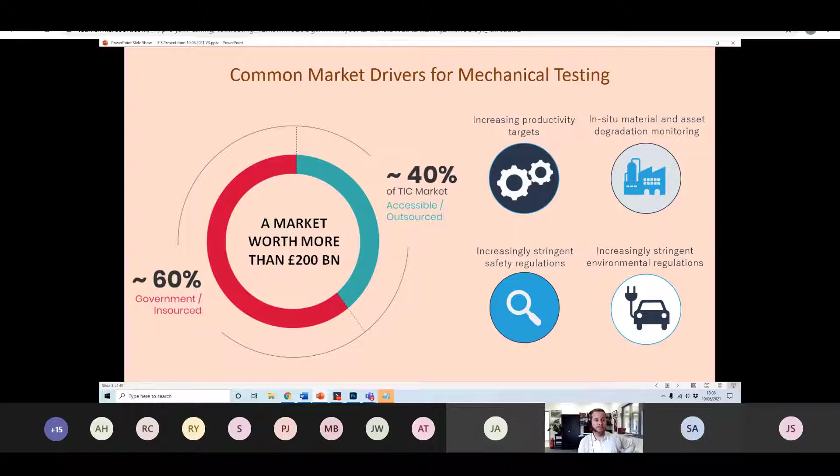Okay, what about then just a very quick, very brief history of mechanical testing methods? Well, we've been interested in mechanical properties since the Stone Age and through the Bronze Age, and from the Bronze Age to the Iron Age and to, well, if you want to call it the Silicon Age now, or whatever. But the importance of materials has been recognised throughout history.

Sometime later, around 1890, early tensile test machines started to become available. And in fact, the tensile test since that time has remained the gold standard in mechanical testing, and it continues to be the go-to method for measuring things like stress strain curves. But it does suffer from some limitations, and we'll maybe cover some of those in a few slides' time.

Also emerging at about the same time, early 1900s, was the Charpy impact test, which can be used for measuring things like the fracture energy or the toughness of materials. And that technique is popular because it's very simple and it's very easy to prepare the specimens, and it therefore continues to be used extensively, much like the common tensile test.

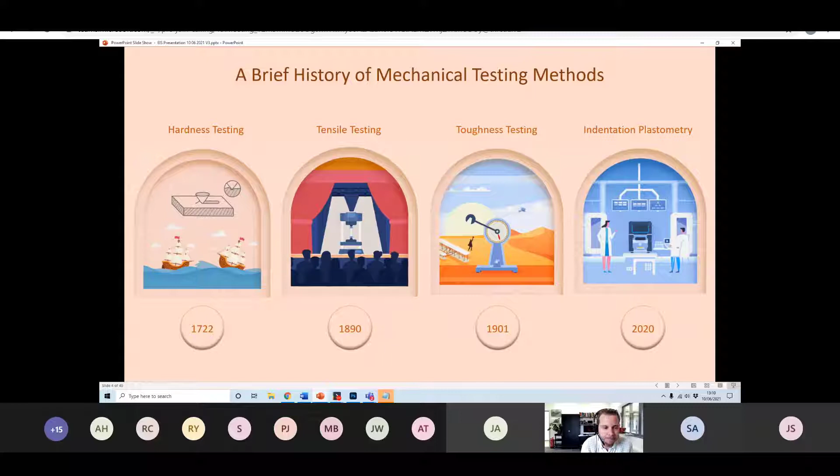What do they mean? How do we define them? Because in my own experience, both when I was at the university in Cambridge and also through my interactions with industries, these terms are sometimes confused. And even when they're not confused, there can be some subtleties and nuances that tend to get lost. And these can actually be really quite important when it comes to interpreting materials testing data, which is why my presentation today is really geared towards trying to clarify some of these points.

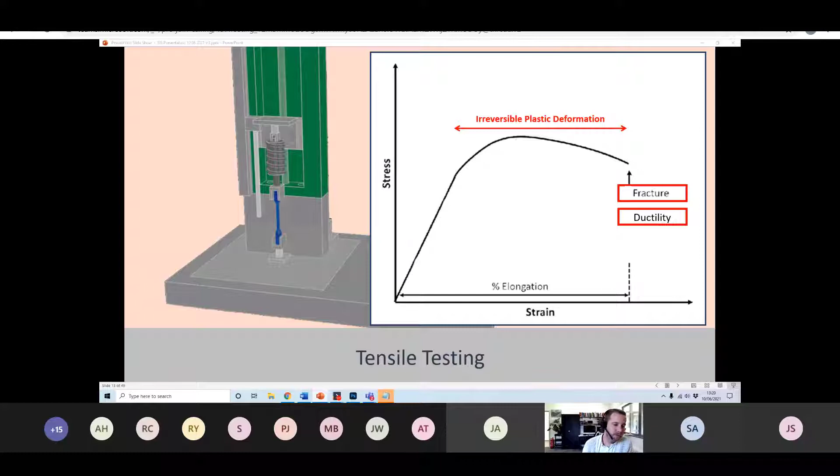So when people cite a ductility value to you, it's often, and I don't mean to be contentious, totally meaningless. If you search the literature for ductility values of a particular alloy, and there's no information about the test specimen dimension, then that information is also meaningless. The only real way a ductility value can be used is to rank different materials tested using the exact same specimen dimensions. Otherwise, ductility values have very limited engineering utility.

As one example, and we won't name names, we've worked in the past to help a company that was using ductility values - measured nominal strain at failure - in their finite element calculations or crash simulations, not understanding that it's totally sensitive to the specimen dimensions they were using in their tensile tests. It made a big difference to the predicted outcomes from those FE simulations. So it's not well understood, but crucially important in some cases because it's related to fracture and failure.

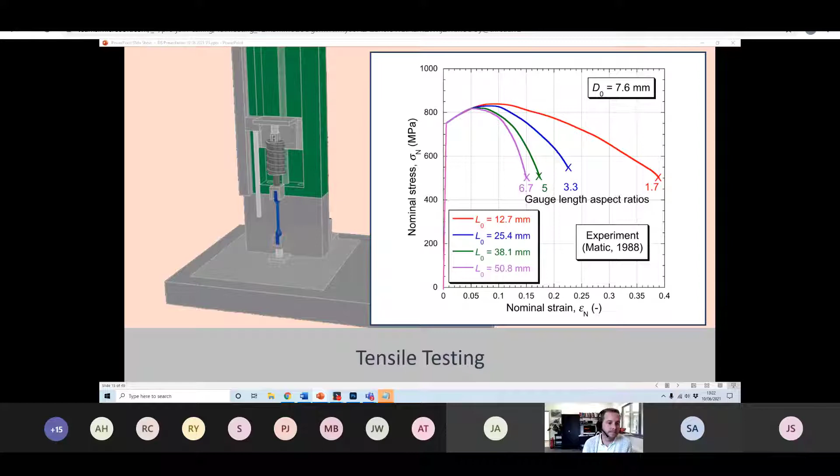One way of very simply confirming that this is not quite right is to compare the units of toughness, which can be expressed either as joules per meter squared or megapascal root meter, with the units of the area under the curve, which is just joules per meter cubed. So the two are dimensionally inconsistent, which is one indication that they're not the same thing.

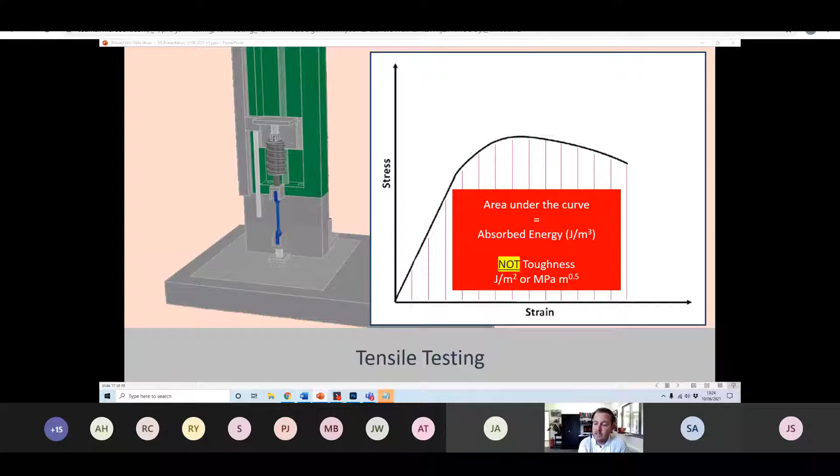In fact, if you want to measure the true toughness of a material, or its fracture energy, it's best to use something like the Charpy impact test. We indicated earlier in our historical overview of mechanical testing that this arrived on the scene around the early 1900s. This is a much better way of measuring toughness because it directly measures the energy absorbed during a fracture test, purely related to the propagation of a crack.

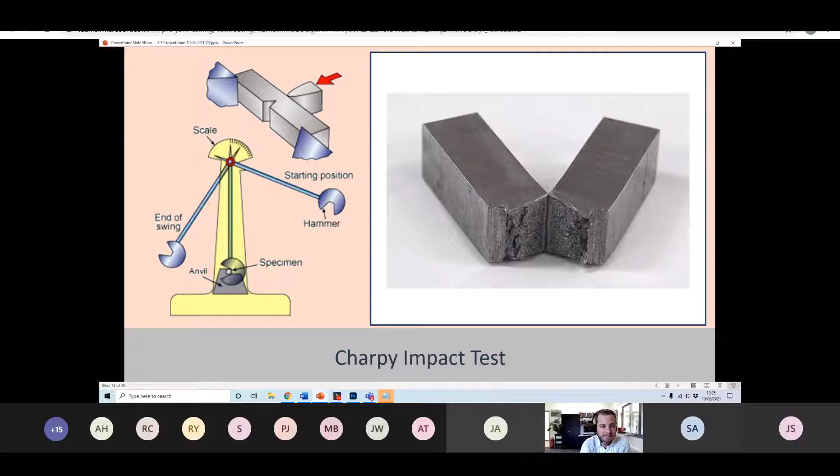All right, so we've done stiffness, strength, ductility, and toughness, and we're now going to move on to hardness. Some of the reasons why these terms get confused is they're often related to each other. Strength, for instance, and hardness are quite closely related, although not in a way which is easy to define.

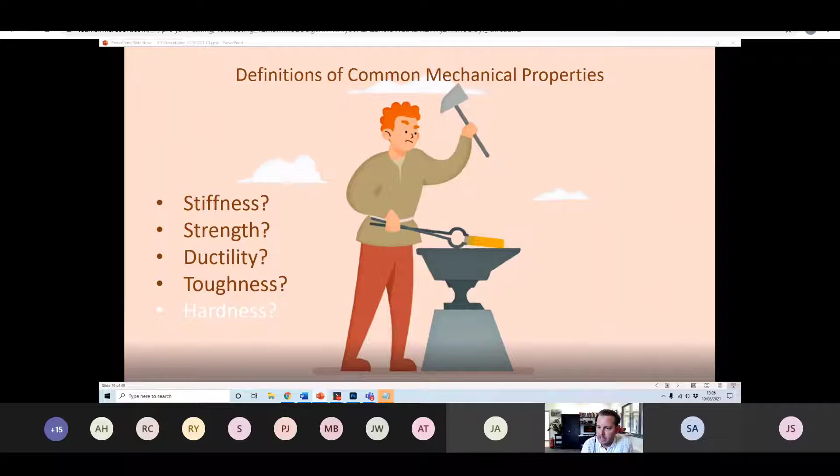So let's again start by defining what hardness is: it is specifically a material's resistance to plastic deformation. Since we're all now familiar with the stress strain curve, we can understand this definition in view of what we know about the yield stress and hardening behavior of material. If hardness is basically a material's resistance to plastic deformation, then materials with high hardness tend to have high yield stress values and/or high work hardening rates.

The work hardening rate is the rate at which the stress approaches the ultimate tensile strength from the yield strength. So the hardness number is very closely related to the stress strain curve, ergo the strength of the material. But importantly, what you cannot do is infer or calculate what the stress strain curve looks like simply from a hardness number. That kind of translation is impossible to do, maybe more on that later.

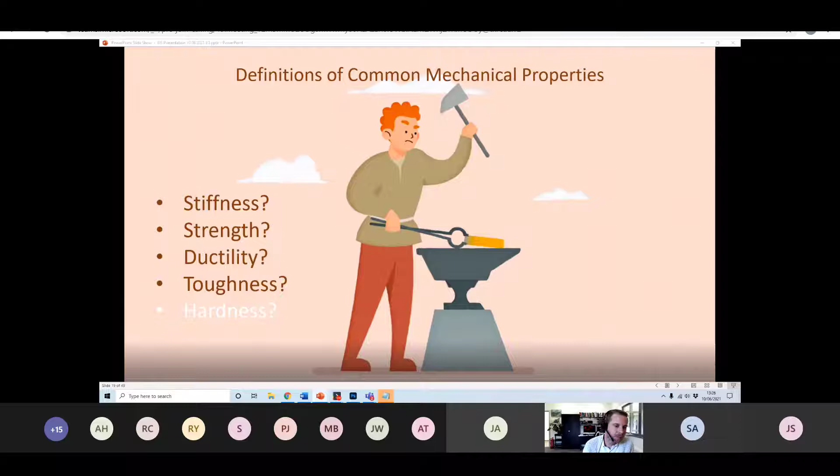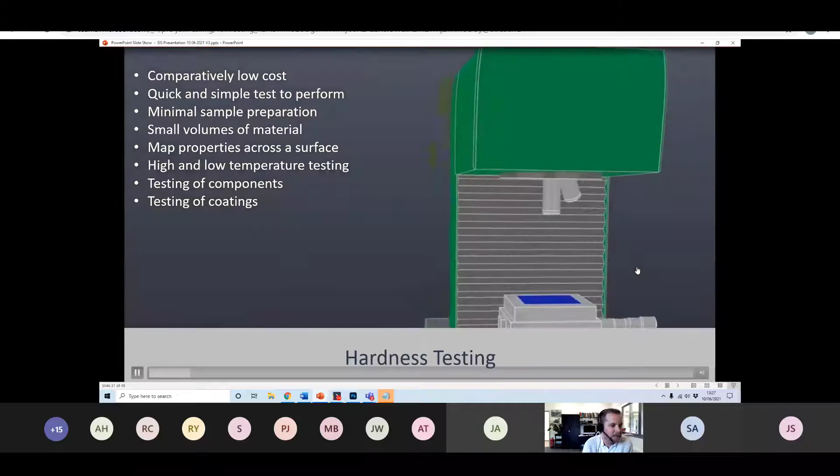The reason why we like hardness testing, and most people are familiar with it, is because it's extremely simple to do. It's very low cost. Sample preparation is minimal. You can test very small volumes of material. You can map properties across a surface. You can do testing at high and low temperature if you want to. You can test real components, and you can even test in-service components. That's some of the reasons why we like hardness testing.

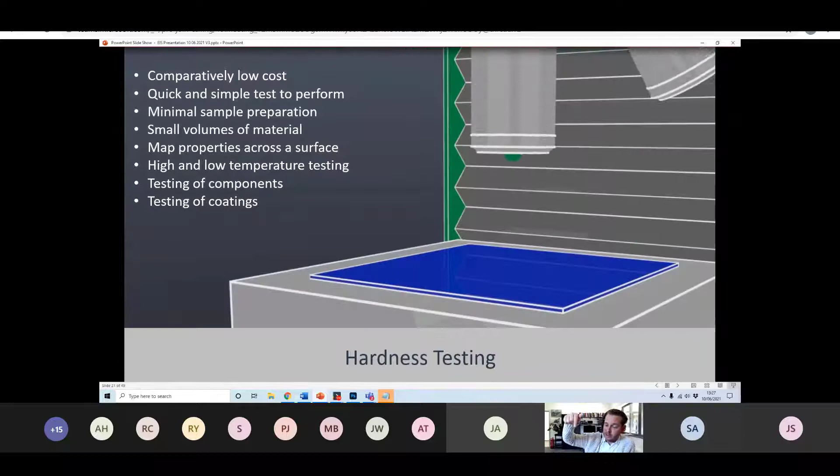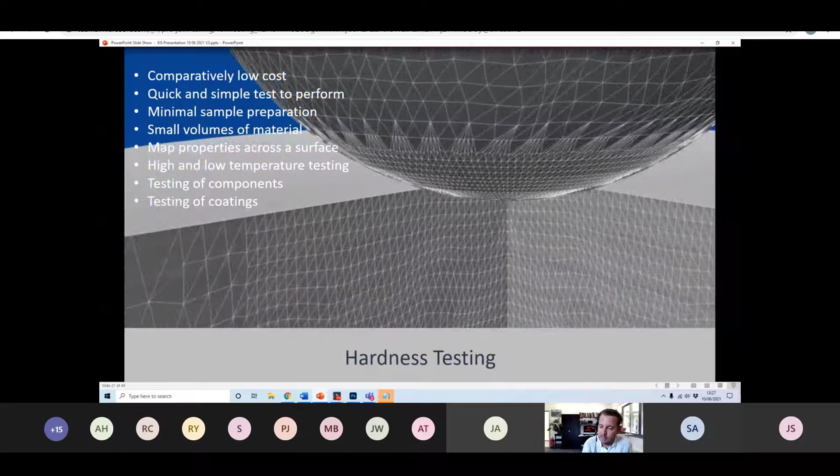And the process is very simple insofar as you simply take a very hard sphere, a pyramidal shape, or a conical shape, and you push it into a material that's a little bit softer. You can measure things like the diameter of the spherical indent or the diagonal across a pyramidal indent. You can calculate a hardness number, and that's all very simple, very easy and reasonably intuitive as well.

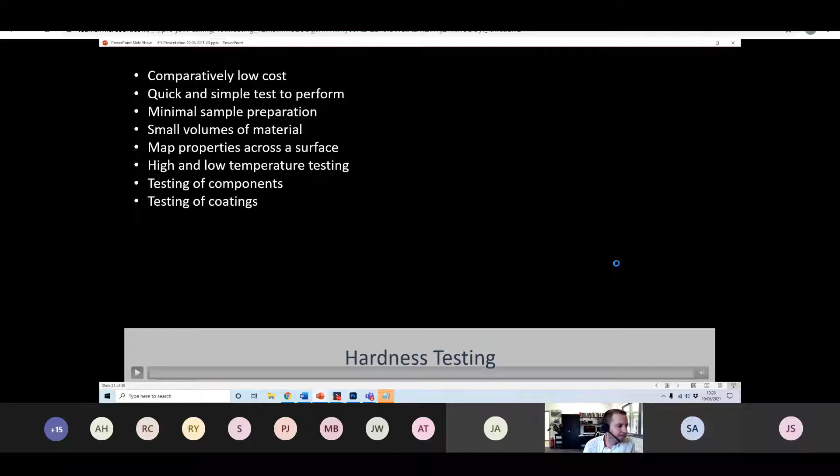That's partly what explains the reason hardness testing is used so extensively. It also explains why hardness tests have been around for hundreds of years.

The problem with hardness numbers, this is the crux of where I'm trying to get to, is that a bit like ductility values, hardness numbers are not fundamental material properties. The hardness number of a material actually changes if you change the shape of the indenter you use or if you change the load that you apply. So hardness numbers can only really be used in a very semi-quantitative way to rank materials.

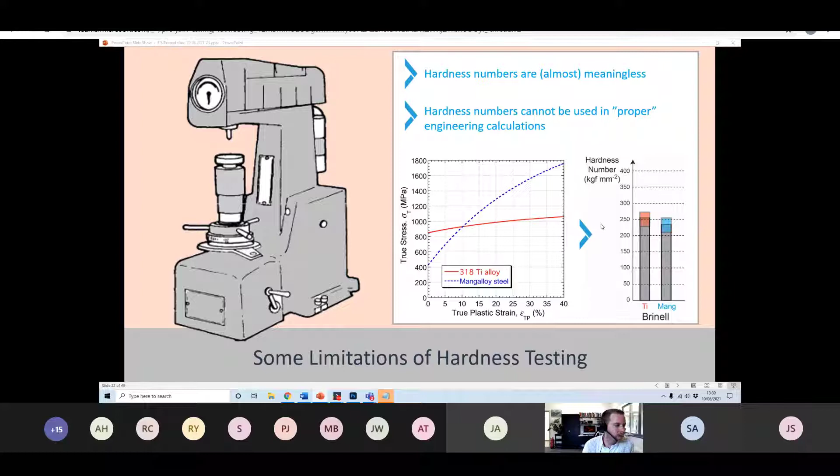Mechanical testing, or uniaxial mechanical testing, as we talked about before, is unquestionably the gold standard for characterizing the strength of materials, but it too suffers from some limitations.

They can be addressed in most cases, but these might include the fact that the machine is very expensive, so you have high capital setup costs. Time consuming as well - not the test itself, which tends to be quite quick, it's actually the preparation of specimens, because you've got to get coupons machined and have access to machining facilities, or outsource that process, which can take quite a lot of time.

You need to make sure the material can be machined - not all metals are very easy to machine. You can suffer from clamping and slippage difficulties or compliance in the system. You can't, of course, test real components, you've got to machine coupons, and also what's not possible, unlike in hardness testing, is mapping of local variations in properties. So some limitations there.

There is a technique though, which in our point of view, accepting of course that we're biased, combines the very best attributes of the tensile test, which is acquisition of full stress strain curves, with the very best attributes of the hardness test, which is ease and simplicity of testing, and this is indentation plastometry.

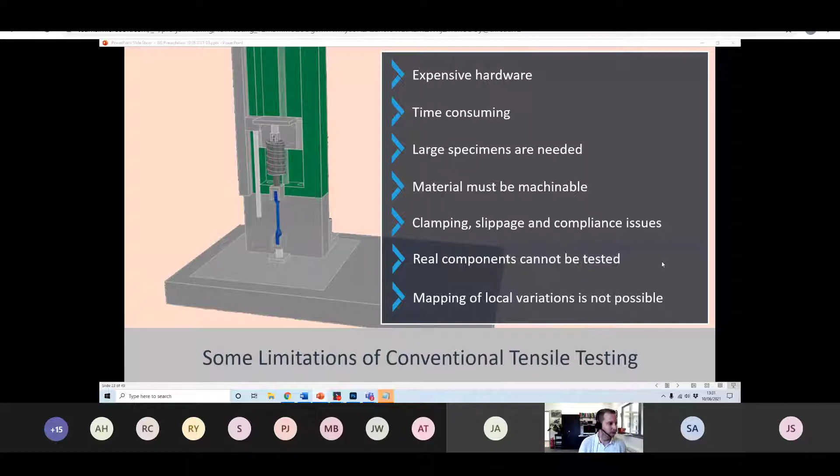To give it its full title, it's actually called profilometry-based inverse finite element analysis, indentation plastometry, but that's too long. So by way of proper introduction, what I've got here is a video - it's a rather fancy animation. There's no sound, so please don't expect any sound on this one.

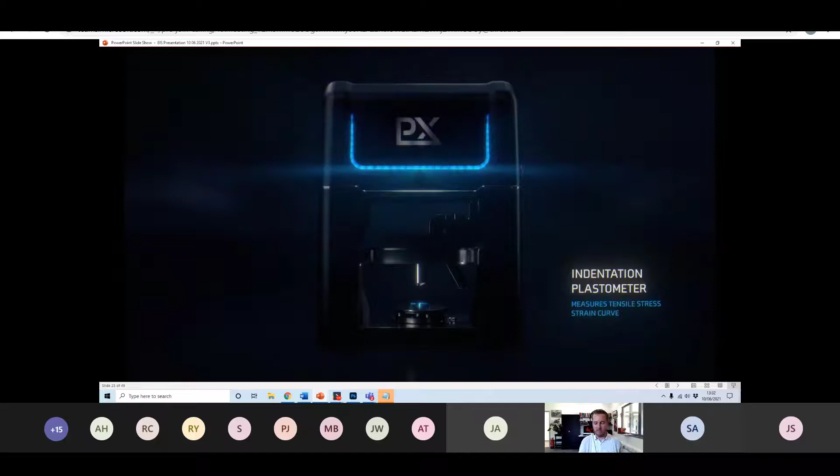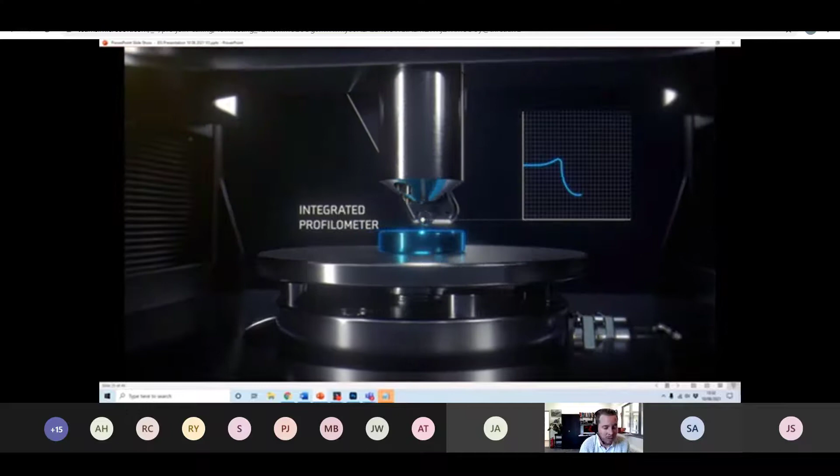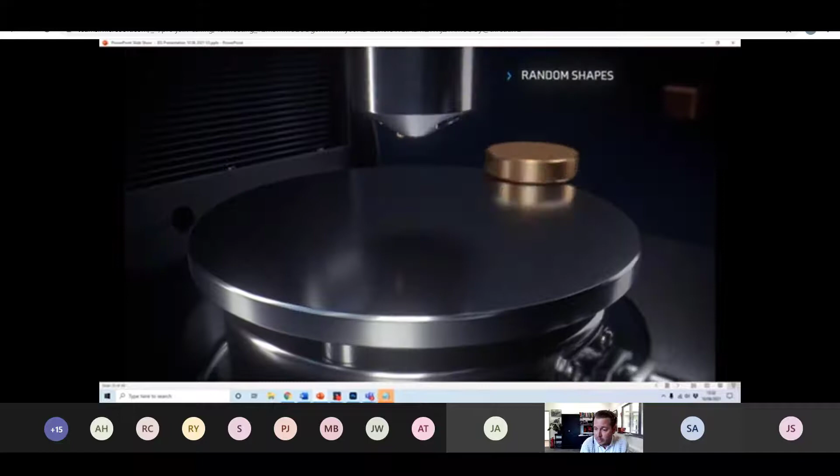Here you'll get to see one of these indentation plastometers. You can see it looks similar in execution to hardness testing - that machine there is performing an indent. Only this time we're coming along with the integrated profilometer, measuring the full profile shape, because that profile shape contains an awful lot of information. It then goes into our software package, SEMPID, where we do some clever optimization work and inverse FE, and we're able to pull out meaningful data like full stress strain curves, strength parameters. We can even calculate hardness numbers if people so want them. And this entire process takes just a matter of minutes.

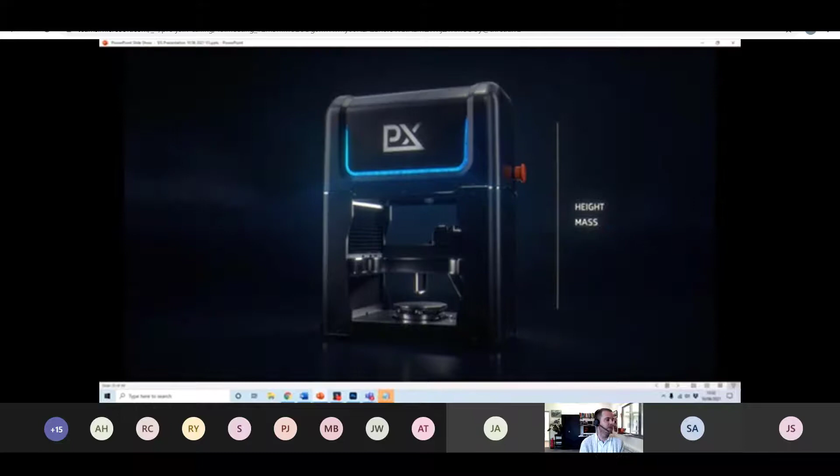It's extremely quick, sub 3 minutes, in fact. So that was the plastometer video. But let's move away from the flashy commercial animation, because that's not where I want to spend my time.

Let's come to the substance of the method and talk more about the science, because the method involves just a few very simple steps that are fully automated. The first is that, as we saw in the video, we indent the sample. The difference at step 2 between that and hardness testing is that we measure the full profile shape.

We do that because we know the full profile shape contains an awful lot of information about the way the material is deformed, and therefore an awful lot of information that can be used to infer the underlying stress strain behaviour.

To do this in our software package, we analyze and operate purely on the residual profile shape, nothing to do with the load displacement curve. And we have this algorithm which returns the stress strain curve very quickly.

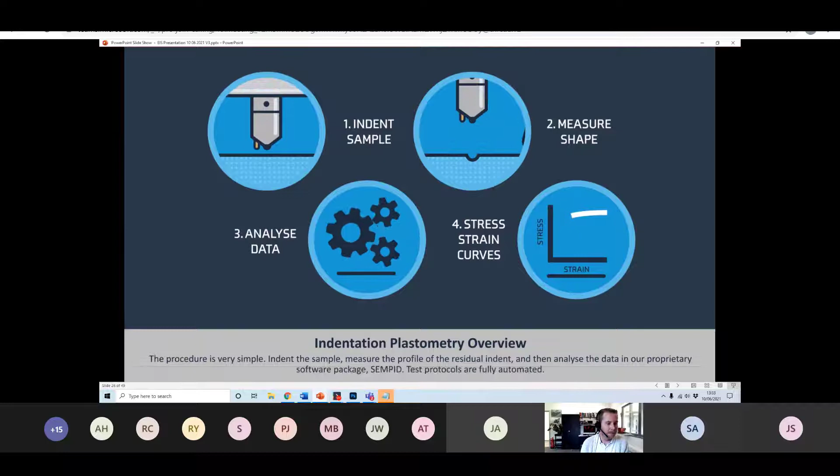If you're interested, not everyone is, but I'll present it nonetheless, in what that algorithm looks like - it's conceptually very, very simple. The process involves conducting the experiment and measuring the residual profile shape.

What we then do is run an equivalent indentation finite element simulation, and in that model we have to specify some constitutive plasticity equation. We can then iteratively adjust the free and unknown parameters in that equation until the measured and predicted profile shapes converge.

While we do this, we monitor the goodness of fit between measured and predicted data, and our objective, or the objective of our software, is to minimize this difference.

Now, like most optimization problems, there are issues of uniqueness to consider, where uniqueness refers to those situations in which multiple combinations of input parameters yield acceptably good agreement between measured and predicted profile shapes.

But during the course of our research, we've looked at this in great detail, and we've been able to implement both experimental testing protocols and computational protocols that allow us to very rapidly identify the unique combination of parameters representative of this material.

This framework we've implemented enables us to converge on the solution very quickly, in just a few seconds. So the approach we're describing here is best described as an accelerated inverse finite element technique.

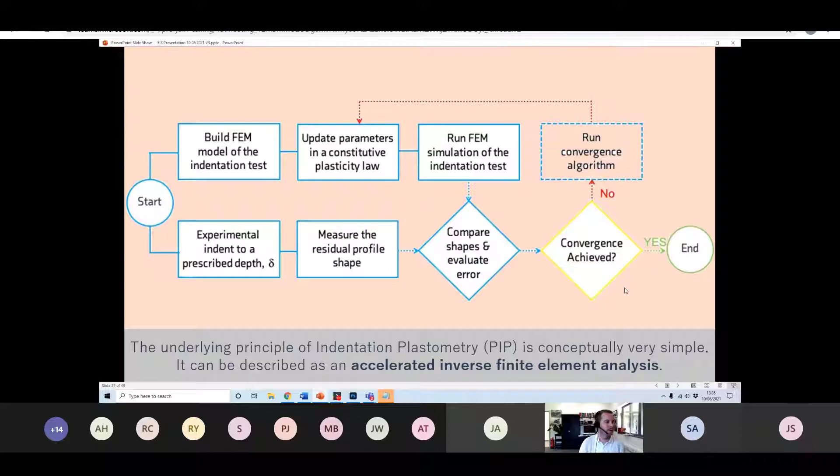Despite people, organizations, and institutes trying to do this, this level of complexity can only actually be captured by employing tools like FEA. It's really important as well.

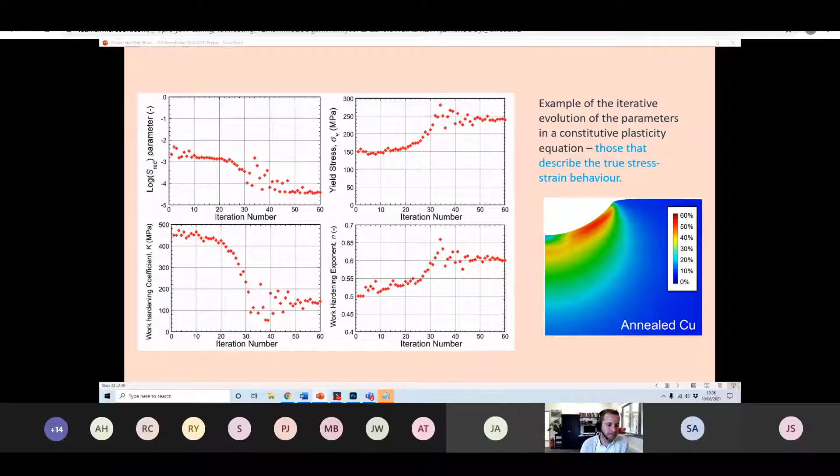Anyway, let's look at a validation example. Let's get to the core of this.

I'm sure you wouldn't expect me to show anything else, but it's important to point out that the key features are being captured here - that is yield stress, hardening behavior, and of course the UTS. In fact, in more recent versions of our software package, we also pull out post-necking behavior as well.

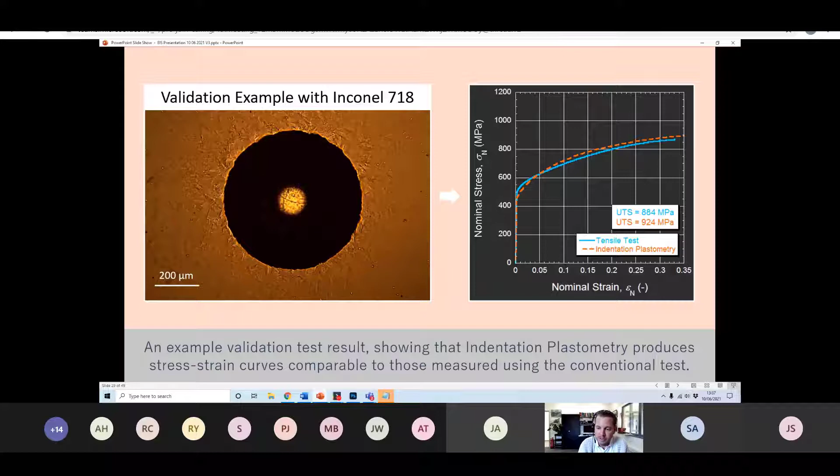So you can see from that micrograph that our indents are comparatively large, at least when compared to those produced by, for example, nano indentation, or even a normal Vickers hardness test. This is deliberate. We deliberately indent materials on a fairly large or coarse scale. They're still quite small, don't forget. That indent on the screen right now is only about a millimetre in diameter, so it's still comparatively small. It's just bigger than things like nano indentation.

Now, the reason we indent on this scale is because the purpose of our technology is to extract bulk or engineering properties, and that means you must be indenting a representative volume of material. You absolutely must be capturing all of the microstructural features that give rise to the macroscopic stress strain behavior you would measure in a common tensile test. If you're indenting into a single grain, as you might in a nano indentation test, you simply cannot get bulk mechanical properties.

In fact, some of those microstructural features are listed on this slide, and they include things like the crystal structure, grain size, texture. Grain boundary structure is really important to macroscopic stress strain behavior. Full alloy composition, impurities, the presence of precipitates, dislocation density - all of these things contribute to the behavior you see in a macroscopic tensile test. So you have to interrogate that with your indent.

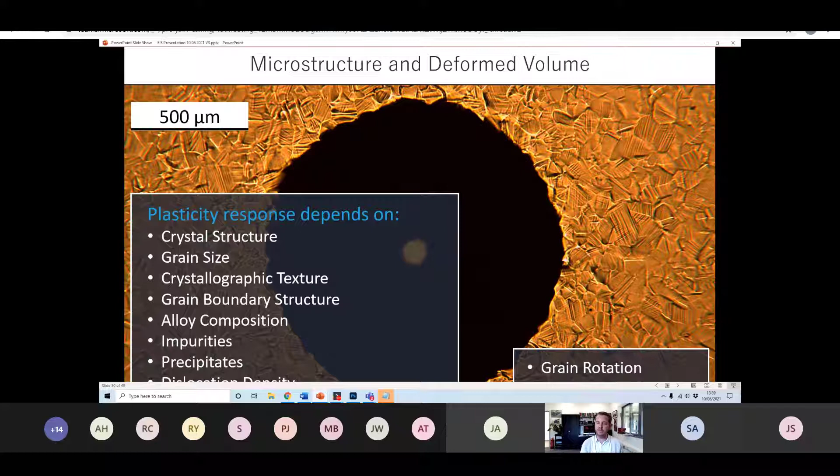Okay, I'd now like to show you, just for the last 10 minutes before we go into questions, a quick case study of indentation plastometry in action. I'll try to keep it brief. It's an example coming from the mining industry.

In the mining industry, they're naturally interested in trying to break rocks. There are many ways you can do this. What the mining industry is trying to do right now is develop new methods for breaking rocks - methods that are greener and more efficient than existing ones. So they're designing new equipment, new comminution equipment, as it's called. There's an example CAD image there of a particular type of comminution apparatus.

Inside that apparatus, you've got rotating components with very hard rotating flingers attached to them, and they rotate extremely fast - thousands of RPM in some instances. What happens in these machines is quite simple: you put the big rocks in at the top, they get smashed about, and then you get small rocks out of the bottom.

The purpose of these calculations is to help design a system that is more efficient at breaking rocks and to try to control the size distribution of the rocks coming out. So it's quite a complex process. Also of importance is the wear performance of the system, which is often life limiting. To be able to predict or calculate wear performance, you need to know something about the strength of the materials as well, and performance under things like abrasion.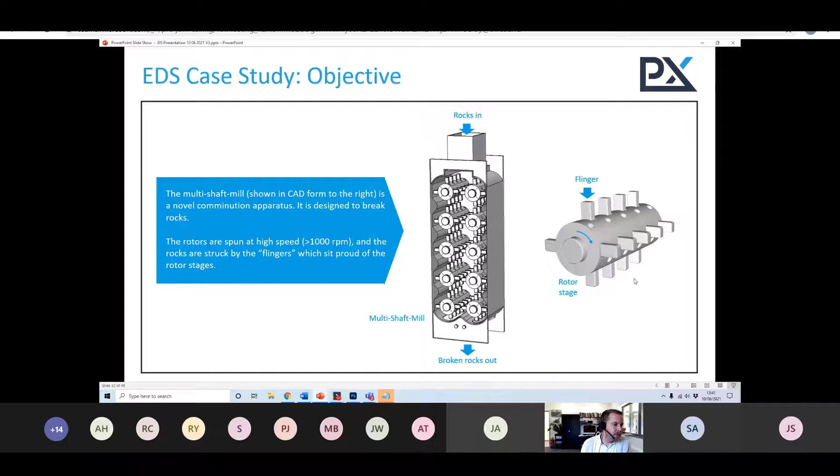So this particular company has been doing some simulation work, and we can see an example in that video of one of those rocks being broken - that's all very interesting, quite nice. You can see something slightly more localized in the animation on the right there.

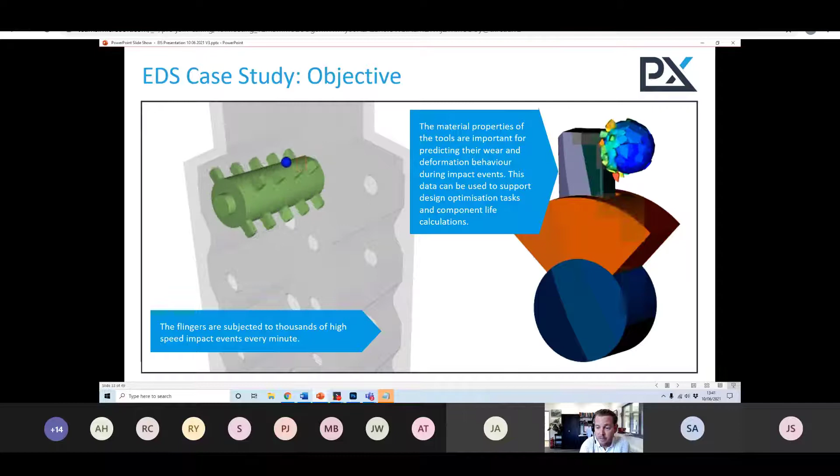As I mentioned, the material properties of the tools used to break these rocks are really important for helping to predict wear life. Understanding what those properties are is really important, because that data can be used to help design the components to maximize life, and therefore efficiency, and therefore return on investment as well.

So if we look at those flingers in slightly more detail, there are two examples in this particular image, and they're manufactured from Hardox stainless steel. On the right hand side, you've got Hardox stainless steel in its as-received condition, which is fine, but on the left hand side you've got one of those components which has had a tungsten carbide insert brazed to its front surface, and that is designed to help prolong the wear life of the components.

The challenge here is that the brazing process is done at very high temperature, over 900 degrees, and over a prolonged period of time. There's a concern, quite rightly, that this brazing process and heat treatment was deleteriously affecting the mechanical properties of the steel, possibly affecting the wear life of the steel, which would be life limiting. So the objective of this study was to characterize the strength characteristics of these materials using indentation plastometry.

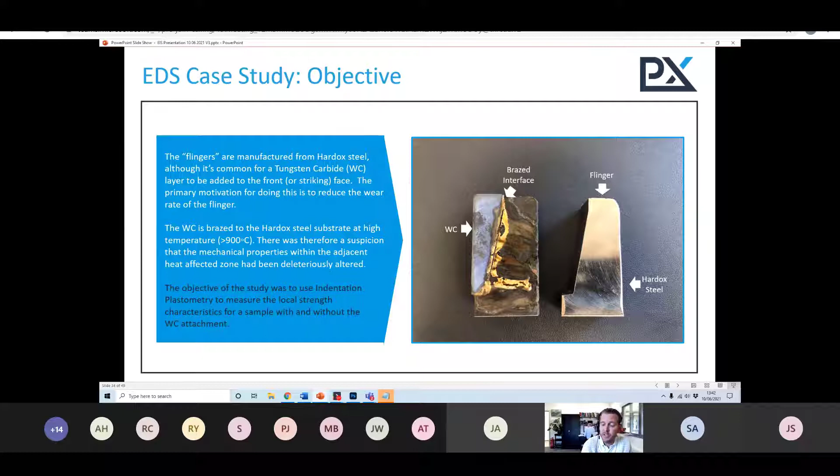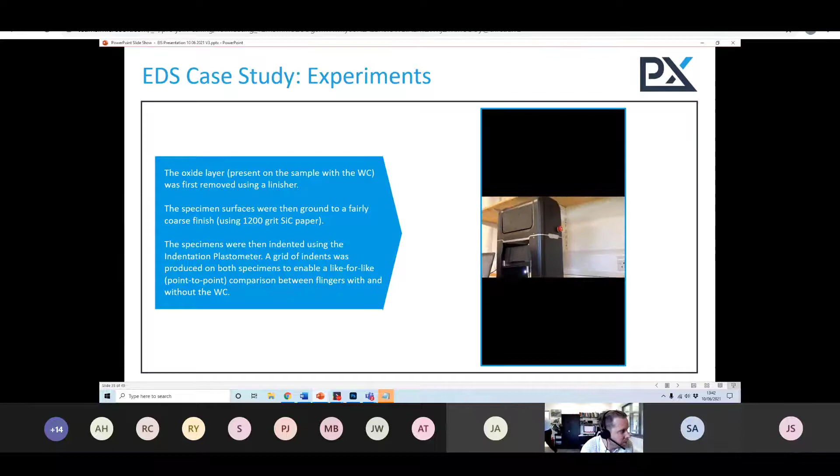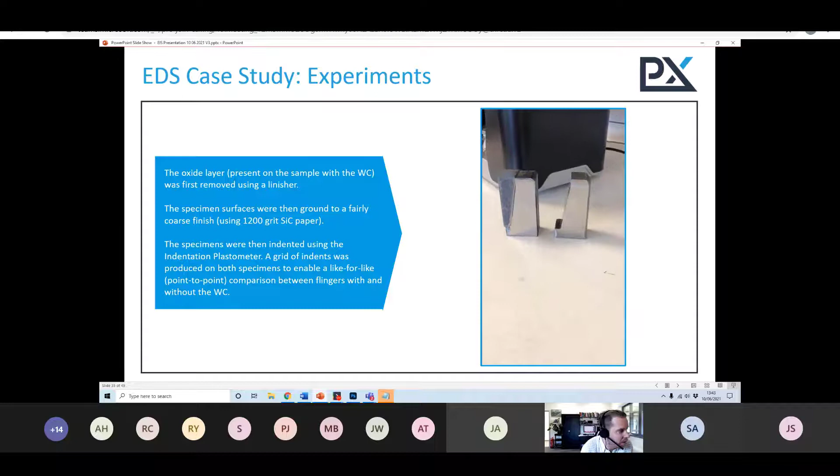Because it simply wasn't possible to do this using conventional tensile test machines. So what we did, as you can see in that video, is we took these two components. What we had to do with the one that had been brazed was essentially remove that surface oxide layer, which is quite sensible, because in that particular case it was very thick. So we've cleaned it up, and it's had a polish and a grind.

Then those materials have been inserted into indentation plastometry. You can see an indentation process taking place there. I think the video at this stage is being accelerated in time. Once that indent is done, you'll see the profilometer coming across. That now is measuring the shape of that profile. Also takes a minute or so, but it's been accelerated here.

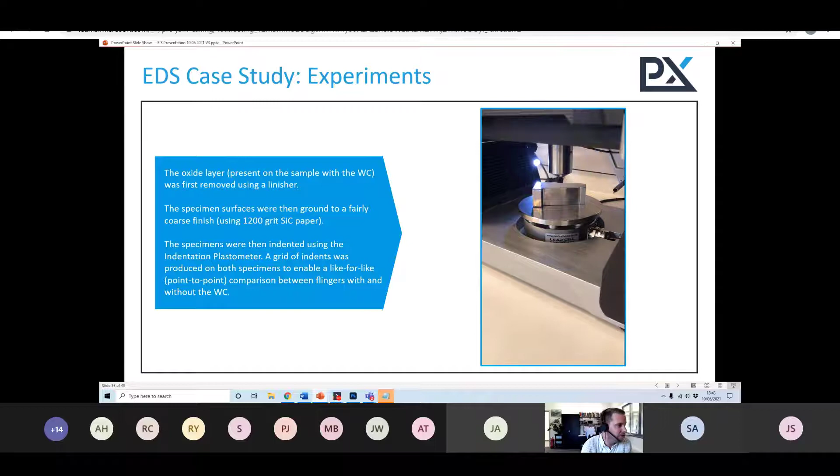And then once you've measured that shape, you can import that into the software package and calculate stress strain curves. Okay, so it's very simple. You can see in the video this array of indents that's been created on the as-received material and on a material that's been subjected to this high temperature brazing process.

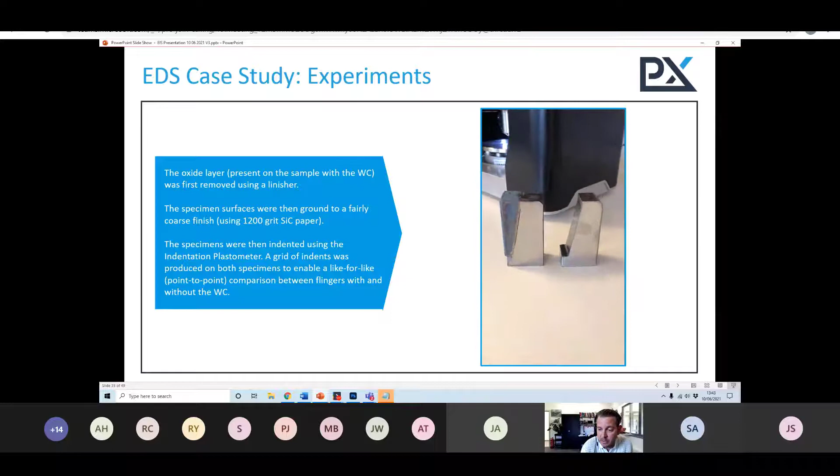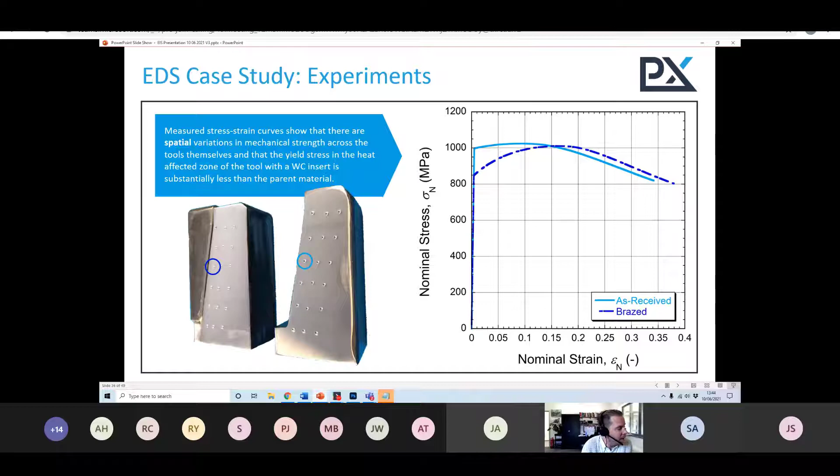And that type of detailed information simply cannot be picked up in a tensile test. Very, very challenging to capture that. Now, that is just a comparison between two locations, corresponding locations.

Now, to finish this off, I want to show something else, which is the corresponding hardness data. So same materials, same brazing processes, same locations for the indents, but this is hardness numbers, Vickers hardness numbers, instead of strength characteristics.

And what you see here is that the picture is more ambiguous than it was with the yield stress, less clear about what's happened. In fact, from the data you can see here, it would almost look as if there'd been no real consistent change in the strength or hardness of the material. And it's because hardness numbers, as I mentioned before, can be really quite ambiguous and quite insensitive to differences in stress strain curves. We showed an example of two very different stress strain behaviors giving very similar hardness numbers in the previous slide.

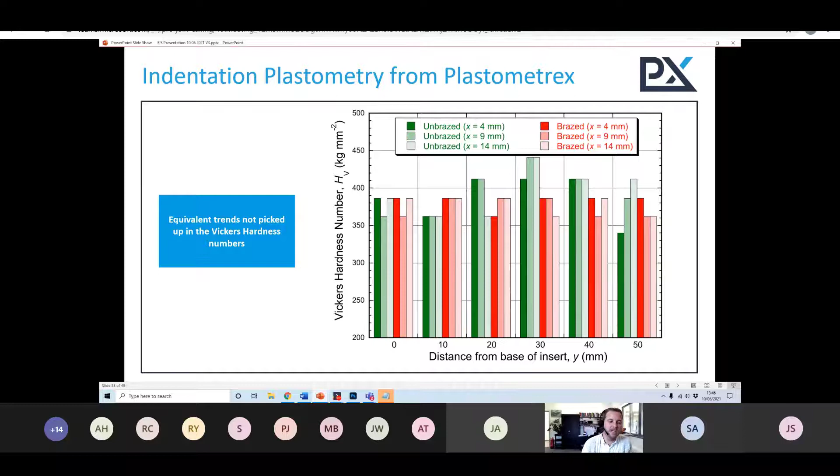So it's just a really important point that's worth thinking about when considering whether or not to use hardness numbers. Is there something better you can do? Can you get more information from something like an indentation plastometry test? And of course, our biased view would always be that you can, with something like indentation plastometry.

Finally, let me summarize what we've done today. We took a brief look at the history of mechanical testing after listing a few reasons why you might conceivably want to do mechanical testing. And we also spent one slide looking at some very simple market drivers, if they weren't already apparent.

We then spent a substantial amount of time looking at the features of the stress strain curve, albeit in a fairly simplistic way, in order to help us define and understand some of the more common mechanical properties we're typically interested in measuring. We then sought to clarify some misunderstandings around ductility and toughness. We then took a very brief look at hardness numbers and came to understand that despite the ease and simplicity of the test, hardness numbers themselves are rather limited in their engineering utility, and slightly ambiguous in their meaning.

We learned of a new technique called indentation plastometry, which appears to combine the best attributes of both the hardness test, i.e. ease and simplicity of testing, with the very best attributes of the tensile test, which is access to full stress strain curves and proper strength information.

And then finally, at the end, we took a look at a very simple case study where results from indentation plastometry were used to identify differences that had occurred because of the heat treating process that was undergone. And with that, I would like to finish and possibly hand back over to Jamie and or Sarah to drive the question session.